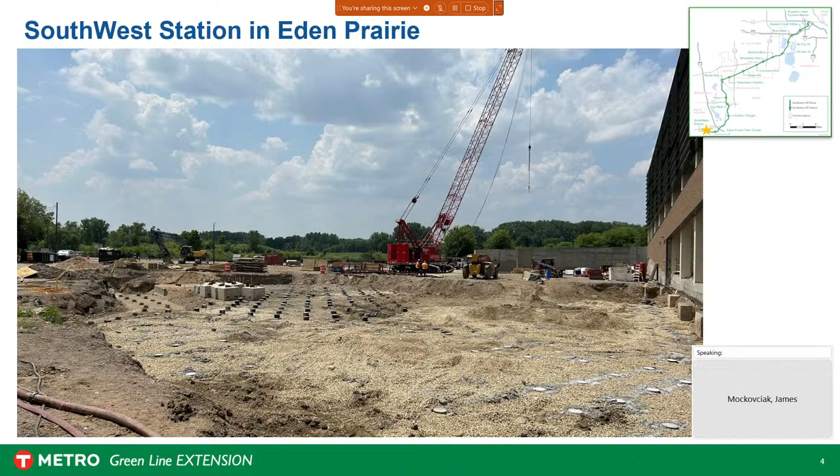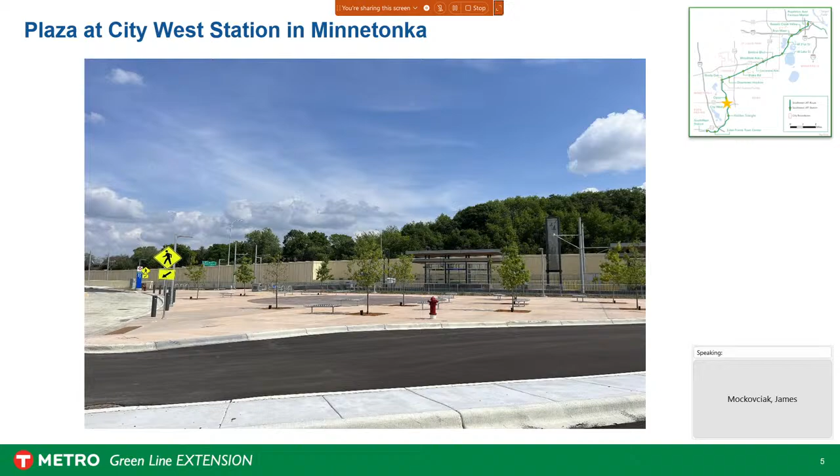As we go under the Highway 62 tunnel, we come out into Opus Park, and we immediately find ourselves at Opus Station. We can see some recently completed trails and sidewalks around the station. On the right-hand side you can see some new development, we've got 1,500 to 2,000 new units being built within a half mile of our station. In the far distance on the left you can see the very large Optum campus on the south side of Highway 62.

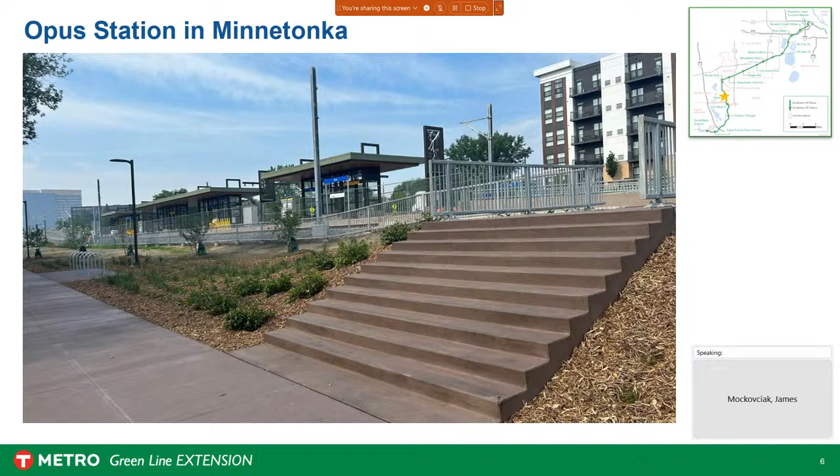Pulling out from the station, you can see the station here, right in the middle in the distance. So we've kind of gone northeast here. On the right we've got some additional trails, some of the development I pointed to earlier, and you can see the tracks are advanced, we've got catenary poles up. There's quite a bit done by the end of the year in the west corridor, about 95 to 98% of the work will be completed, so it's quite advanced on that side of the corridor.

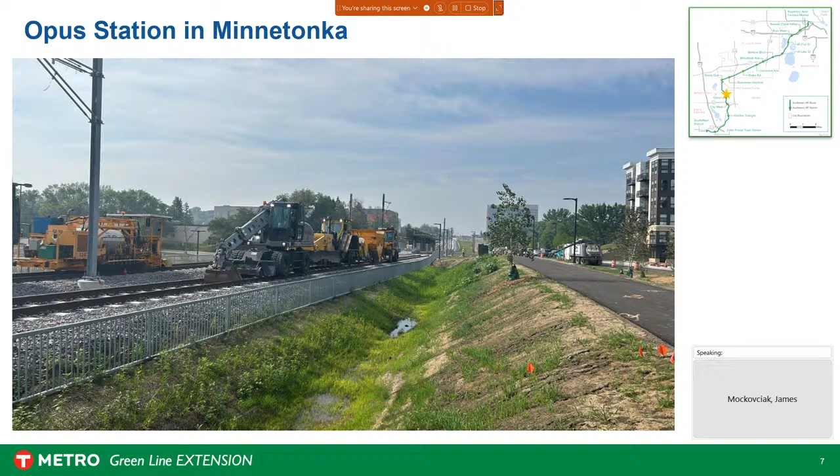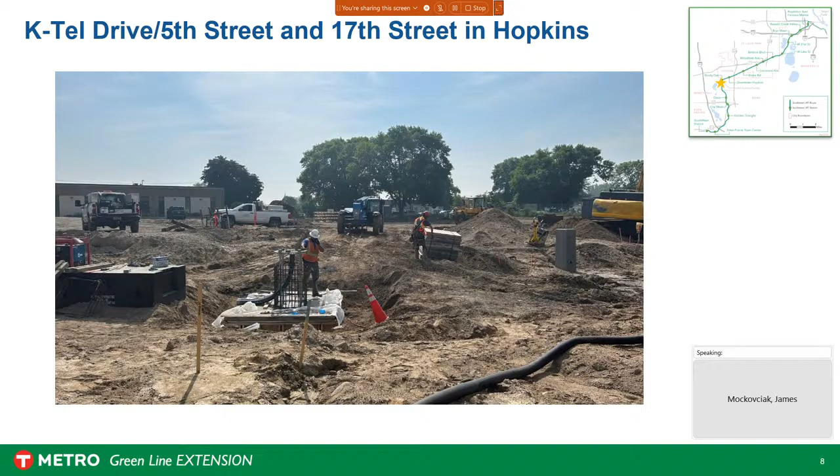Continuing to move east, we leave Opus Park and cross the longest bridge in the corridor, the Minnetonka-Hopkins Bridge, ending up in Hopkins around K-Tel 5th, a little south of Excelsior Drive. Here you can see the center of the K-Tel 5th extension. We're going to extend 17th Street from Excelsior Drive, which is north on the right-hand side of the photograph, looking west again. This is the junction of that extension on 17th Street and the reconfiguring of the 5th and K-Tel connection.

Continuing east, we have our Louisiana Avenue Bridge. Here is the LRT bridge, though the tracks haven't quite gotten this far yet. It's not as advanced as the earlier photos of Opus Park and what you'll see in the west, but eventually we'll have tracks here. On the right-hand side, we've got our freight rail bridge.

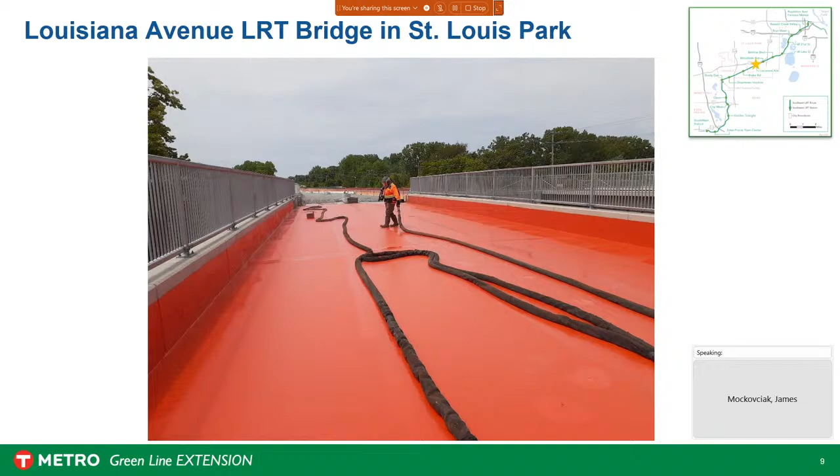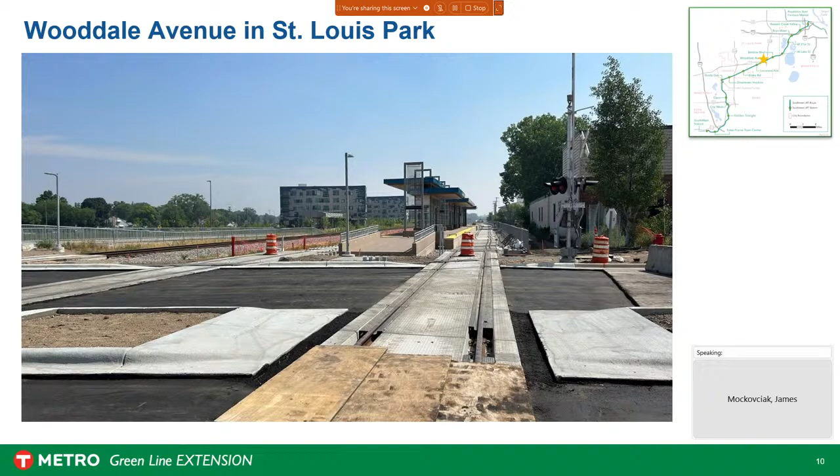To the north of that, we have our PED bridge. Continuing on to Wooddale Avenue, we recently completed the intersection here. You can see our Wooddale Station, and looking east, we've got our track tubs in at grade for an at-grade crossing. In the distance on the left, you can see the fairly new Via Sol development.

Continuing on, as we start heading toward the Kenilworth corridor, we've got our West Lake Street Station. That bridge you see is the Lake Street Bridge, for those familiar with it. And this is a vertical circulation.

You can see the steel frame being erected, and we'll have a circulator on both this side, the west side, and also on the east side. This is one of two circulators here. We've got another one we'll show you in Bryn Mawr and another in Bassett Creek, vertical circulators that take people up to the highways and additional connections.

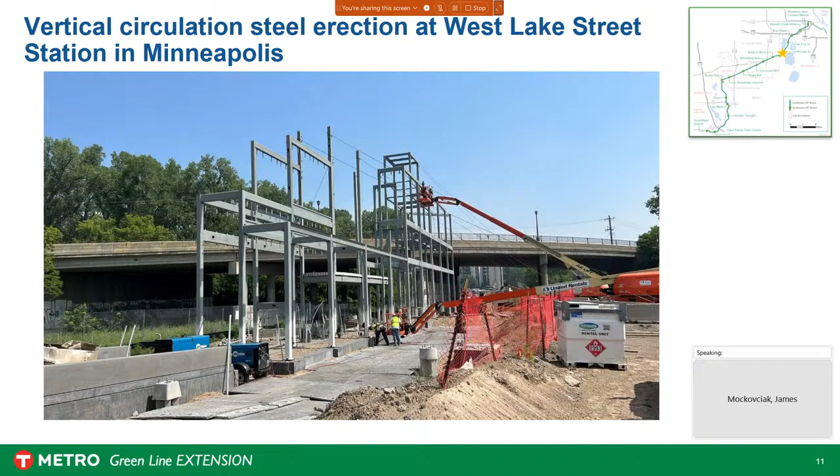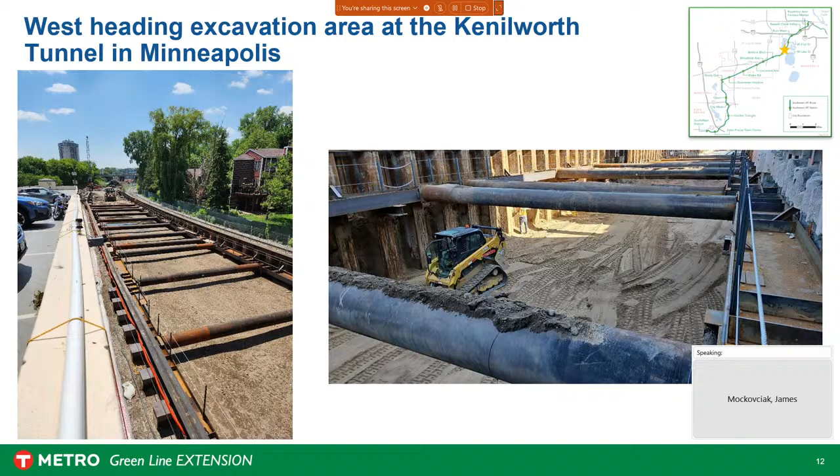Continuing east from that point, you can see some of the more advanced construction, the complicated structures, and some of the sophisticated methodological techniques used here. You can see both tunnels on the right and the left as we're looking east.

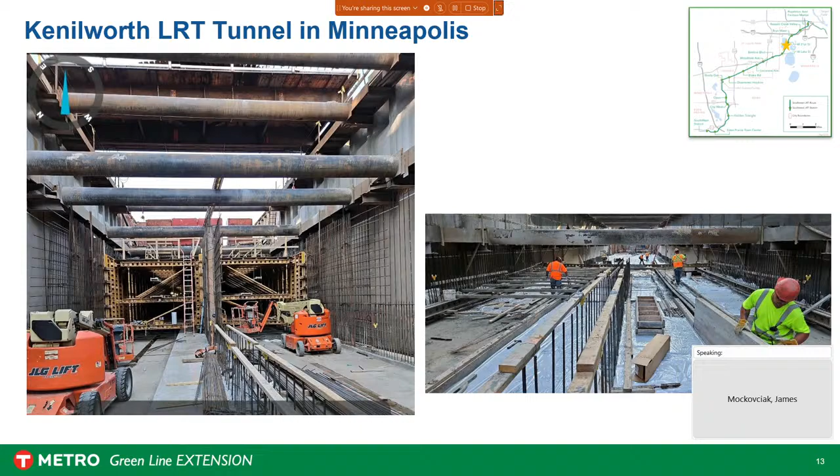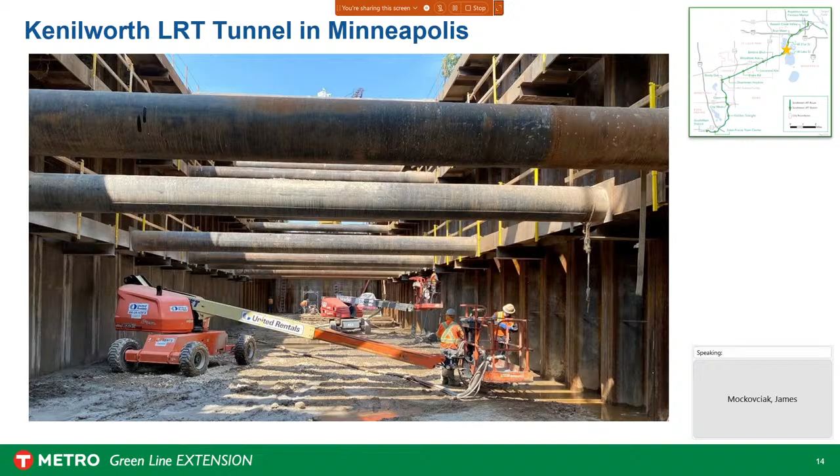Again, close up, this is on the other end of the tunnel, the eastern side. You can see it's a little more advanced than the first slide, where you saw the initial excavation just beginning. This is the excavation continuing a little deeper, but not quite as advanced as the last slide, where you see some of the tunnel actually constructed.

Moving on to the Cedar Lake Channel, again we have three bridges: the trail bridge, the LRT bridge, and the freight rail bridge. We expect the area will be open somewhere near the end of September. Underneath here we've got our WPA wall, an historical wall that runs on both sides of the channel, which is also nearing completion. So the channel should be open relatively soon.

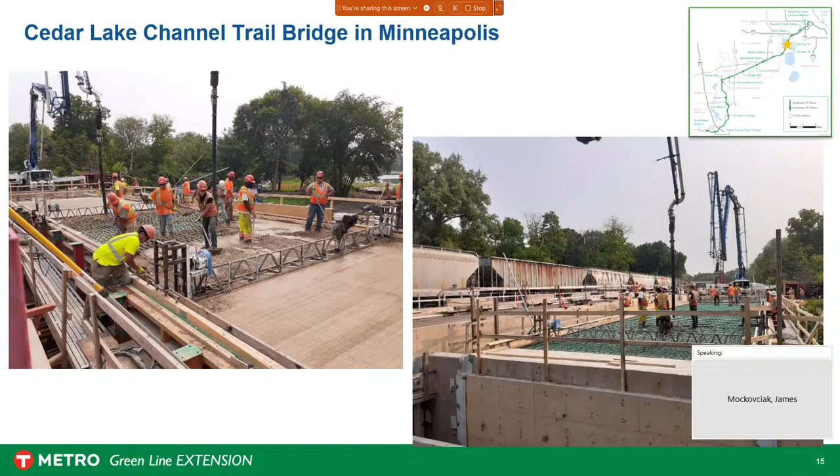Continuing on along the corridor, you've got our Bryn Mawr station, which involved a very large pedestrian bridge installation. We're looking from south of 394 here, somewhat southward. You can see our abutment, and we installed both sides of that pedestrian bridge so people can walk from just south of 394 on the Bryn Mawr exit to get to the station. There's also a vertical circulator at the other end leading people to the station.

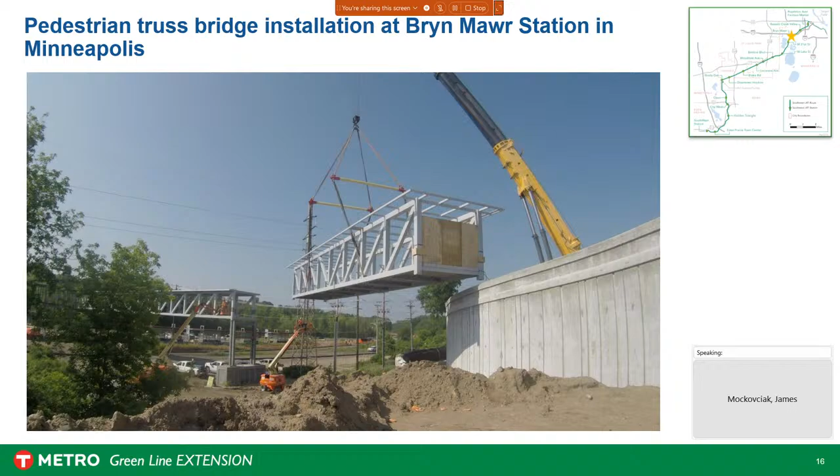Continuing on, this is our Bassett Creek Valley Station, with another vertical circulator. You can see the station in the distance under the bridge on the left. And if you look carefully in the bottom right corner, you can see our corridor protection wall, that mile-long wall we installed separating us from the freight rail.

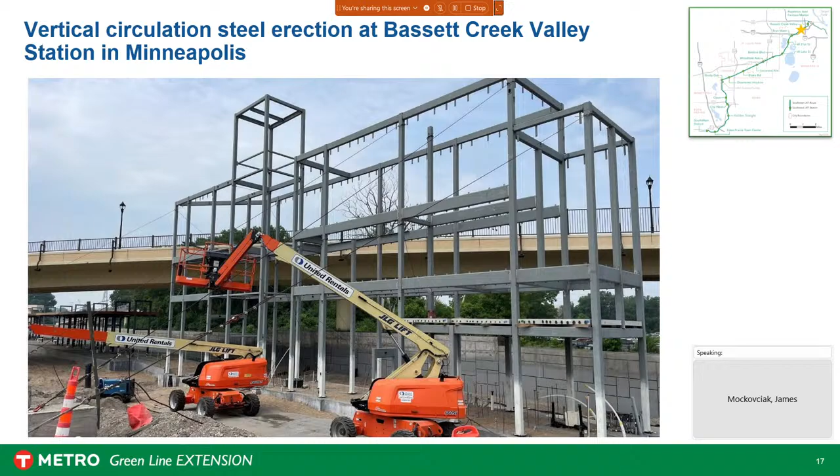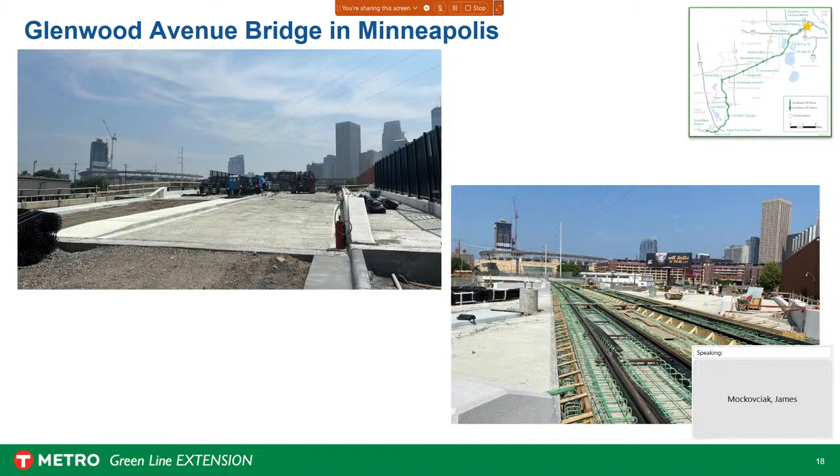Glenwood Avenue Bridge is a very complex project where the LRT bridge will cross the pathway of the grade-level crossing of the new Glenwood Avenue Bridge. That's also anticipated to reopen in the next few months, so the Glenwood Avenue Bridge will be opening this year.

And then the final station before Target Field Station, our Royalston Avenue Farmers Market Station. This is one of two dual track stations where we have track access, or station access to the platform, from either side. So you have to cross from one side to the other if you want to change directions. We have the dual track here, and then down at Southwest Station at the other end is the other dual track station. All those in between are usually single track, so you can get on either side of the platform.

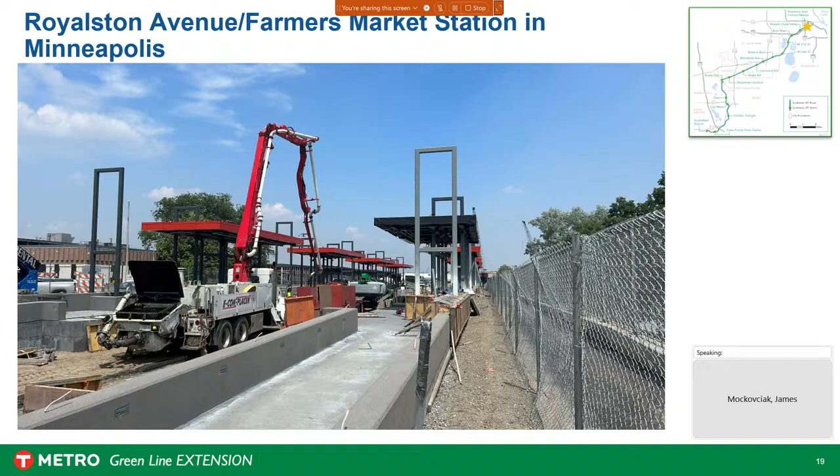I think that kind of winds up the civil portion of this presentation. We'll move on to the systems contract.

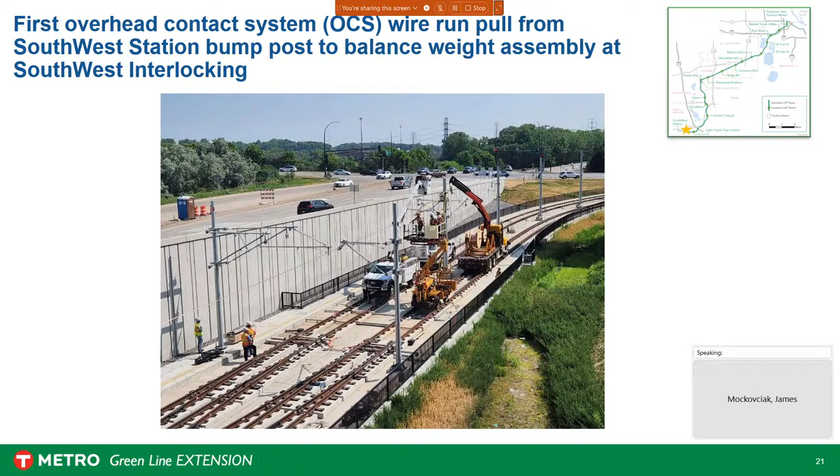Again, some of the interesting high rail vehicles—they're outfitted specially to roll on the tracks. You see some more wire being run, the OCS poles, and then the OCS wires being run, and they're starting at Southwest Station, and then they'll continue east.

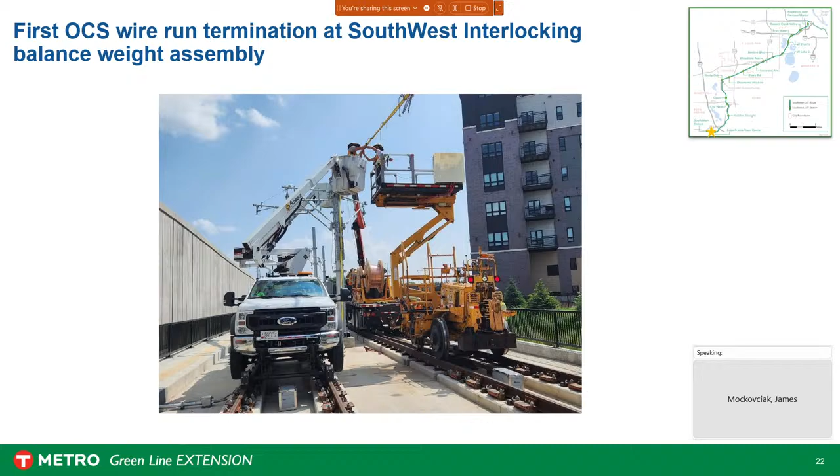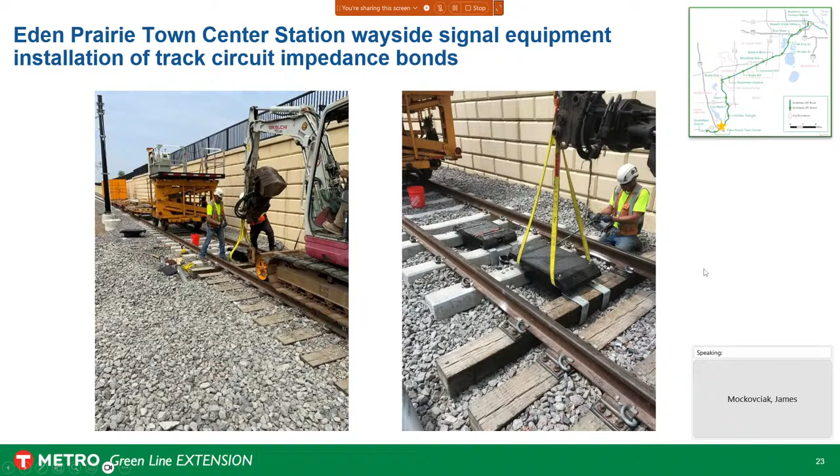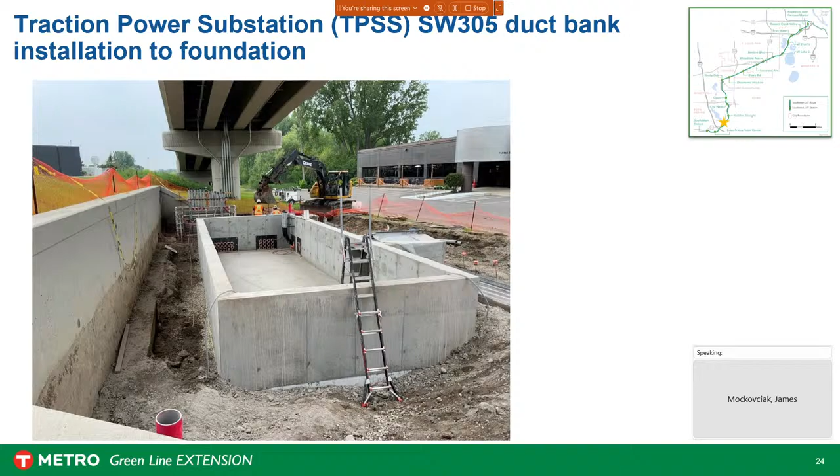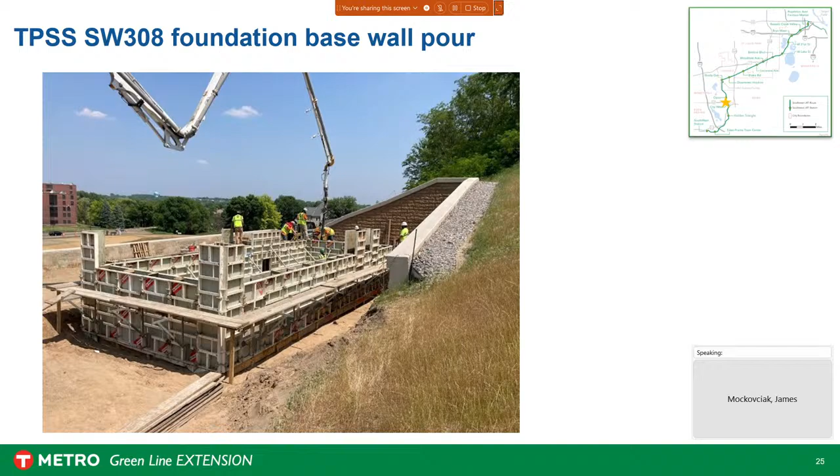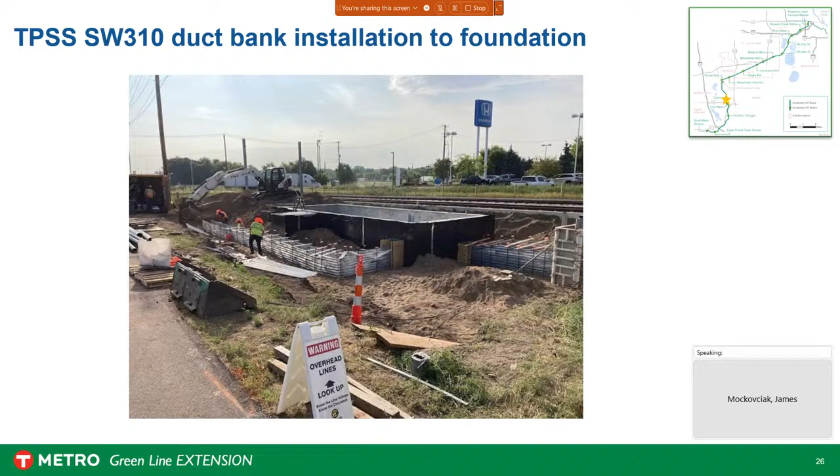That is the end of my presentation. Thank you.